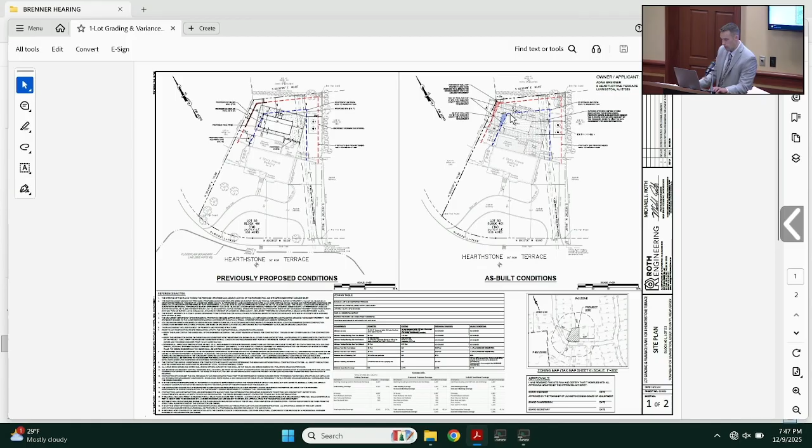Yes, so these are the plans that are on file. Correct -- the plans before you on each screen, sheet 1 of 2, is the site plan sheet from the submitted plans with a revision date of April 14, 2025. The right view shows the conditions that were built. I'm going to zoom in so we can see what the relief is that we're requesting.

Mr. Skolnick, other than the color, is this what was submitted to the board? I think we submitted it with color -- we did submit it with color, yeah. There we go, even better. Mr. Skolnick, can you just move the mic for me?

Okay, so Mike, in my opening statement I called out about 7 square feet of the spa, and that's backing up to the school property in the back? Correct, yeah, and I'll run through each item.

So we have the constructed pool located 14.4 feet from the west side property line and 19.8 feet from the north rear property line, where the minimum requirement is 20 feet. The constructed spa is set back 17.8 feet from the north rear property line, where the minimum requirement is 20 feet.

So those are the two variances, the first two. The pool setback line on this plan is shown by the blue dash line, and the hatched blue areas are the areas that don't comply with the setback. We're talking about 7 square feet for the spa and approximately 73 square feet for the pool. Those blue hatched areas do not comply.

Next, for the constructed wall, the wall is located 1 foot off the subject property line. We're proposing to remove that encroachment. The minimum requirement is 5 feet, so the dashed red line is the 5-foot setback, and the hatched red area is the area that doesn't comply.

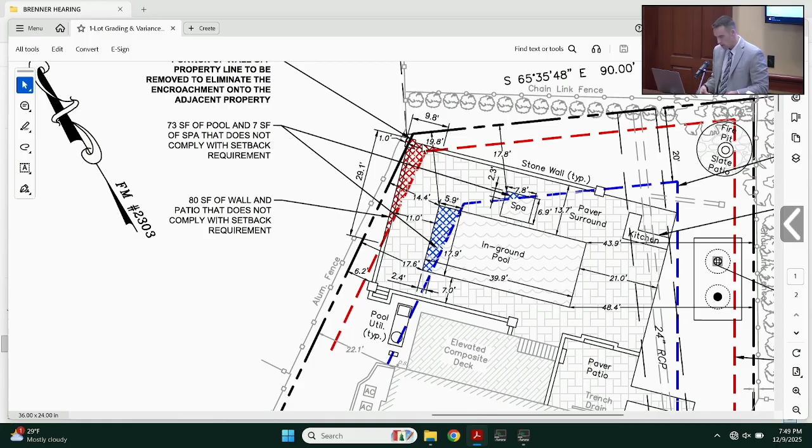Okay, can you go to that third slide there with the exhibit? Sure, let's go right into that.

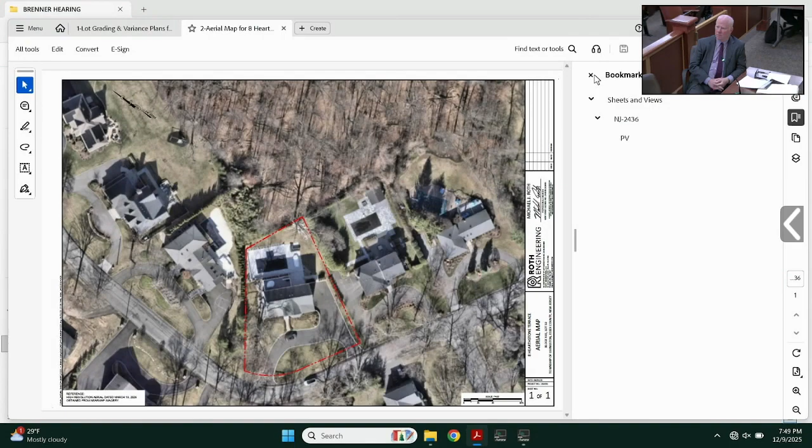We prepared two different exhibits that we look at in conjunction. We have an aerial map which shows the subject property outlined in red and the surrounding properties, and we look at that alongside site photographs. We'll have to mark these since we're starting from scratch. Mr. Roth, if you go back to that one, the aerial will be marked as Exhibit A1. And if you flip over to the other image, we'll mark that as Exhibit A2, which is a site photograph package with five photographs within it.

So I'll flip back to the aerial map. The common property line that's the focus of discussion tonight is the western property line, where the adjacent property is 10 Hearthstone Terrace, on the left. I'll walk you through the photographs. Right now we're looking northwest along that common property line. You can see the existing landscape buffer there. That's a pretty dense buffer you've got.

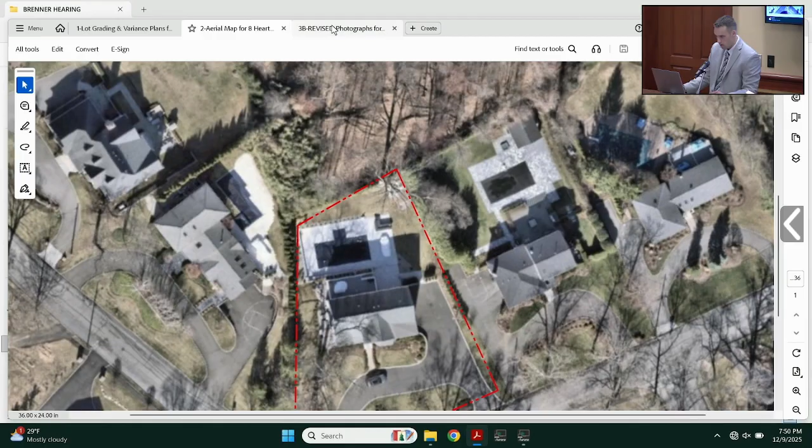Absolutely. Now we're getting a little closer, in the backyard, same view looking northwest along that common property line. What we did with this photograph is, as you can see, the constructed pool and patio are on the right side. We have an existing fence, and then this very well buffered area along the fence.

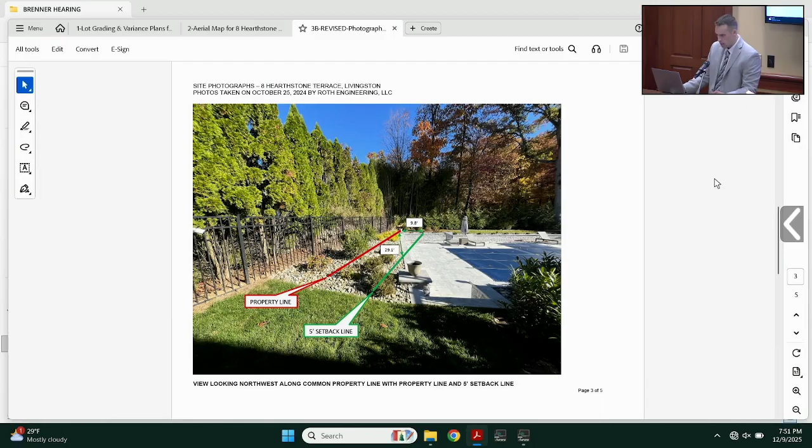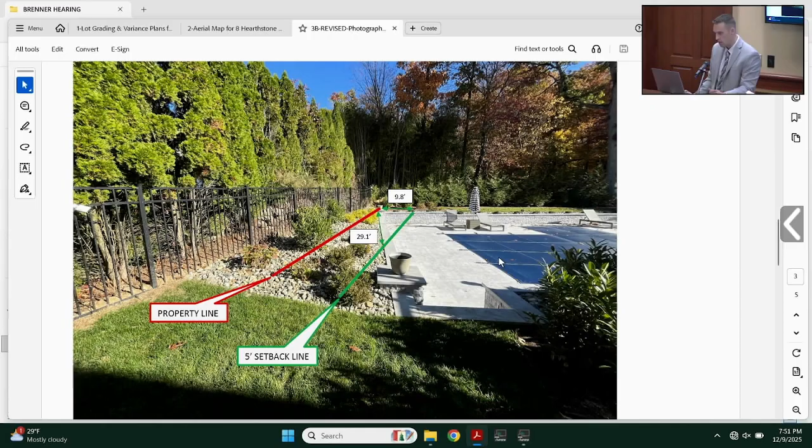On page 3 of 5 here, what we've done is superimpose the property line in red, and the 5-foot setback is shown in green. By doing this, you really see the visual impact, and there really is no impact to the adjacent property based upon the topographic grade change between the two properties and the fact that it's extremely well buffered along that common property line. So let's run through this.

You have this marking 29.1 feet and 9.8 feet - that's the portion of the 3-foot wall that's causing the need for that variance. Correct, that's the portion that doesn't comply.

Okay, and you heard Ms. Brenner say, look, it can be moved, they're willing to move it, but is it really going to do anything from a practical land use standpoint to help out the neighbor, given the grade change and the buffer? I think that's the question I'll pose to you as a planner. Sure, yeah. Do you see any detriment here to the public good, which our courts have said is the neighbor's property?

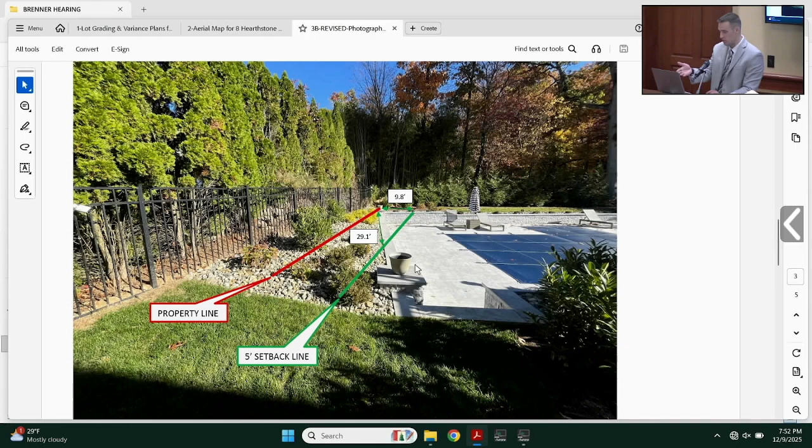Right, so yeah, I see that there is none. By moving the wall, nothing changes with this existing landscape buffer, it's going to remain the same. The fact that it's there today, it works well, it screens the neighbor's property. I see virtually no detriment to the adjacent lot.

So, in essence, we're saying this is a de minimis, virtually no detriment sort of case. Even if we could move that 3-foot wall, it could be torn up and placed on the green line, that would comply, right? Correct. That 5-foot setback only affects a portion of the 3-foot wall.

If it was picked up and moved and placed on the green line, we'd eliminate that variance. That's correct. Can I interrupt just for a point of clarification on the picture, because I'm confused?

I see the property line in red, but you have the fence, and you need a pool fence that the property owner puts. Are you saying there's no fence, and that's the neighbor's fence on the left? I'm not sure it's fenced, but there's an agreement between the neighbors. Livingston has some rules and regulations about sharing pool fences. Okay, so this is a sharing of a pool fence situation? Yeah, I just want to make sure I was understanding the picture correctly.

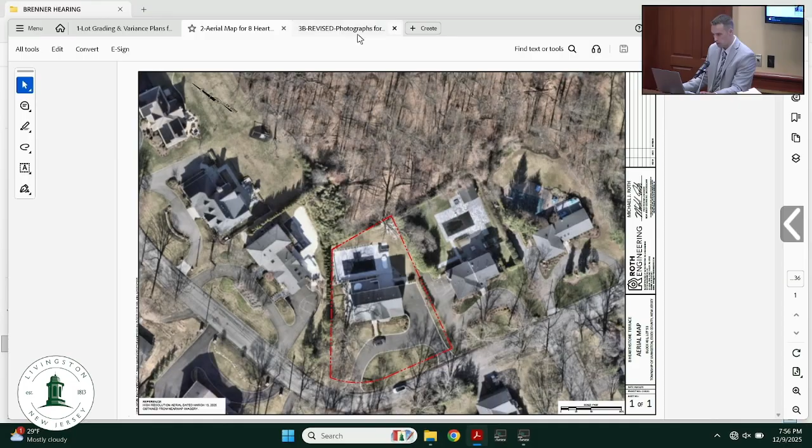Okay, if you balance those aesthetic and related benefits versus the detriments, do you have an opinion on whether we outweigh here? Yeah, I would say the benefits definitely outweigh any detriment for the project. And I will note that the township stormwater requirement is actually quite high compared to other towns. We have a drywell designed for the 25-year storm, which we're talking about 6 inches of runoff. So we feel that we're mitigating the project based upon that stormwater management system. So some additional benefit.

Compared. So, Chairman, that's most of it. I know some of the members have heard it's not that complicated of a case, but our core argument is really that this is a no detriment or virtually no detriment case, even if we were starting from scratch and it wasn't built. And we appreciate the very difficult position that this puts the board in. We understand that. I've had a few cases now. These are all quite difficult for you because you're faced with something that was built and something happened here. But we're here to try to make it right and correct it and go about it in the right way. But I think that the 7 square feet for the spa, the 73 square feet for the pool, and a portion of a 3-foot retaining wall, really imperceptible to the neighbor.

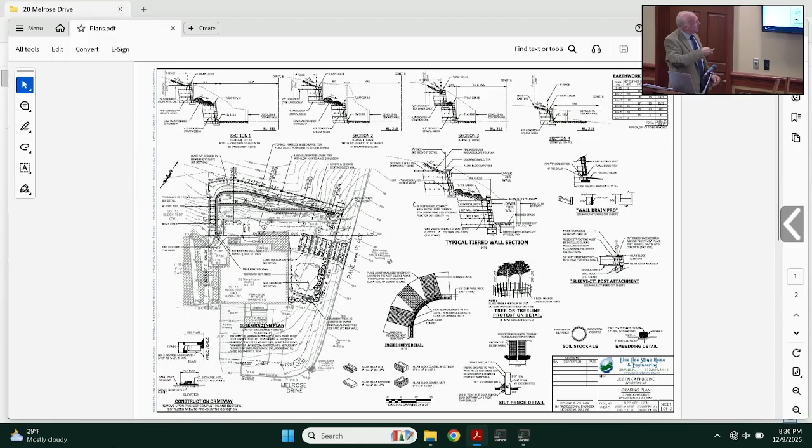In between. Why isn't this working? Oh, it doesn't work on there. How about that? Yeah, okay. So basically, here's the lower tier wall, and then this is the upper tier wall.

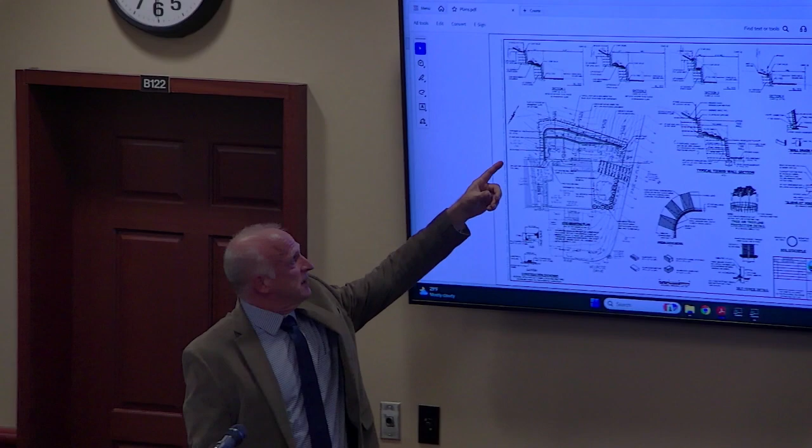Lower tier wall, maximum 6 feet, 6 feet exposed height. And the maximum height on this wall back here is 4 feet. I say exposed because obviously there's a little bit that's buried in the ground.

And also on the upper tier wall, it slopes up from the front of the wall to the back, at a 4-to-1 slope, which is traversable. You can walk on it. It's not so steep that you couldn't walk on it.

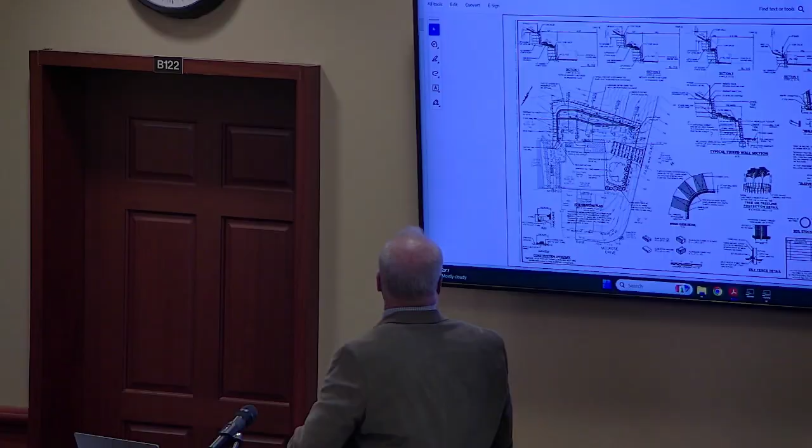But that was provided to be able to push the wall back as far as possible and still not affect the rear neighbor behind. That was really what drove this whole project, the rear property line.

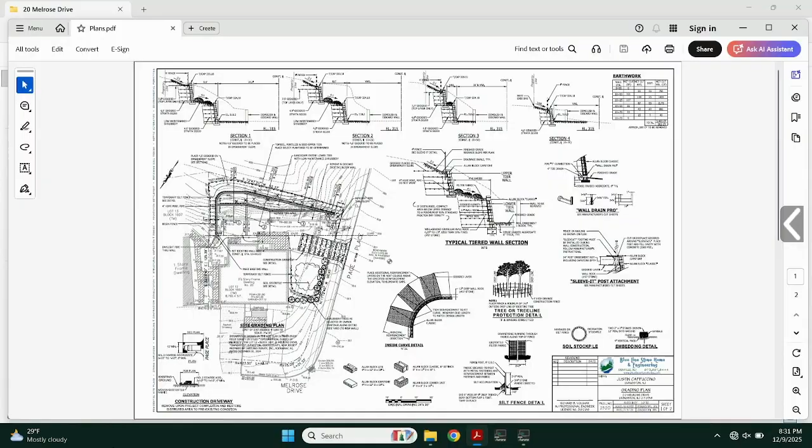So just to jump back a little bit, there is an existing wall there now. It's about 4 feet high, a CMU block wall, not the most attractive wall. This is a modernized, updated wall, called modular block.

You've seen them all throughout town. They have a decorative face, a chiseled rock look to them, as opposed to the sheer, bland CMU wall that's there now.

So that wall is about 16 feet from the back of the house. As you can see, the family is growing, so their objective is to increase the size of that backyard to make it usable, and make it a fair and reasonable use of their backyard.

So what we've done, I think, is listen to the commentary from the zoning officer. We've met those comments, and we've kind of arrived at a median where, yes, we do need a variance for height.

I will submit that the way the code is written, it looks at the overall height from the bottom of this wall to the top of that. That's what gets us to 13 feet, which is why we're here.

But the spirit of that ordinance, I would submit, is a 10-foot exposed face of wall, and that's what we have. We have a 6-foot lower wall and a 4-foot upper wall, designed that way so it doesn't look top-heavy, like the upper wall is going to fall over on top of the bottom one. So again, back to the aesthetically pleasing aspect of it, we think we've met that.

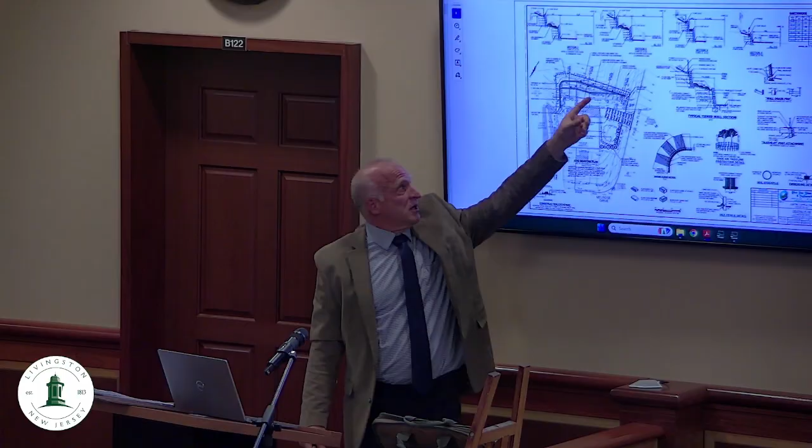They've since planted some arborvitaes along here to stem the tide of the erosion that's happening and flowing over the wall. But it's kind of a mess, the slope is a mess.

And we think that by providing this two-tiered system now, we meet two objectives. Obviously the safety issue will be eliminated because the trees are going to have to come down, and it stabilizes the slope. We'll no longer have this sheer face of dirt that is eroding onto their backyard. So we meet two positive criteria there: it's a safety issue and also a drainage issue.

To touch on the drainage, whenever you construct or design a wall, you want to make sure you provide a mechanism for the water behind the wall that's going to percolate into the ground to have relief. I've done that. There's weep holes, holes in the bottom of the wall, with perforated pipe that collects the water and allows it to drain out the front, releasing any soil pressure on the back of the wall. That's how these are able to stand up.

I've had this question before at other boards about the water—how much, is it going to erode the property? The water that comes out of this pipe is best defined as a trickle. Even in heavy rain, it takes a long time for the water to perk down, get in that pipe, and outlet. It comes out less than your gutter does—nothing substantial with any velocity or erosive power. It's basically there to release the wet soil pressure from behind the wall. I've provided that in two points, here and here.

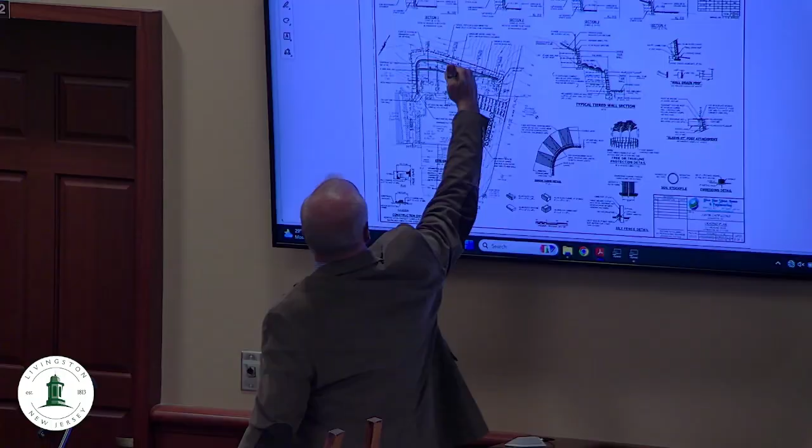As you can see, there's still a good bit of yard they won't be able to use, but we're dressing it up—it's aesthetically pleasing, the wall. We're adding vegetation on that mid-tier, and at the top, for safety, there's going to be a 4-foot fence as well. So that's my pitch.

Does anyone on the board have any questions for this witness? Why don't you go first then? Yeah, the board was handed out five. I violated my own rule.

The board was handed out 5 photographs on 5 pages, color photographs of the current conditions of the rear yard. Would you agree we'll mark this as Exhibit A? We'll give Ms. Hollis this set.

And that is a fair representation of the current condition, Mr. Vollmer? Yes, sir. That one there tells the whole story—you can see those exposed roots. Matter of fact, the tree that used to be there, there was a couple of trees, right Justin? They were leaning, and they've already been taken down.

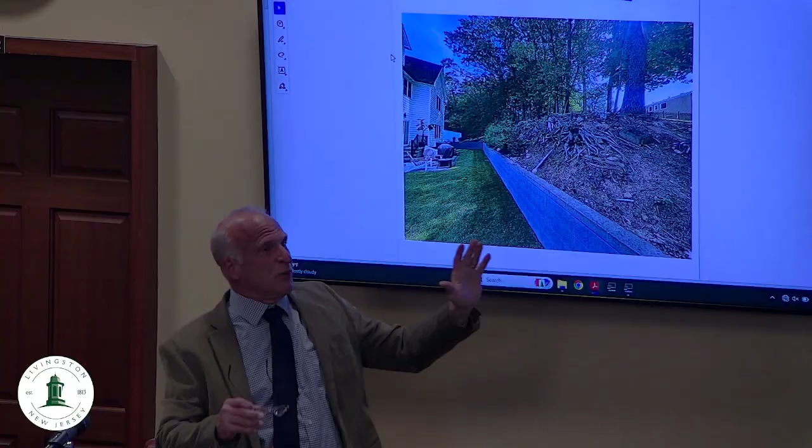This is what was there, these exposed roots. Here's the arborvitaes that they planted to try to control it. The picture really doesn't do it justice. It's a hard climb for me when I'm stood on this wall, and we were kind of eyeballing how far we could pull this wall back. It's pretty steep here on the upper wall. I'm not sure if this tree has to go or not, but this pretty much shows the condition. I don't know if it gets the full flavor of how steep and ugly this is, but it is.

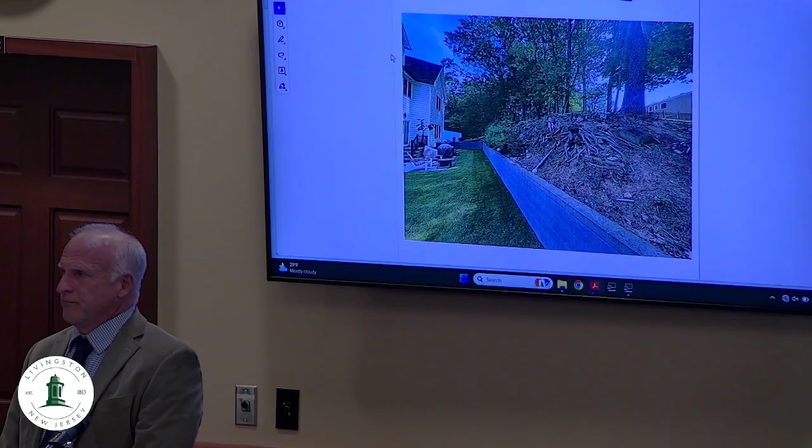So, Mr. Vollmer, what you're showing there, going to your C1 proofs, what you're saying is because of the severity of the grade and the slope, the property owners don't have any other option than to use a retaining wall system in order to gain backyard space. Correct. The other option would be to have no wall and just grade it up at a reasonable 2-to-1 slope that would be sustainable. However, we don't have that luxury.

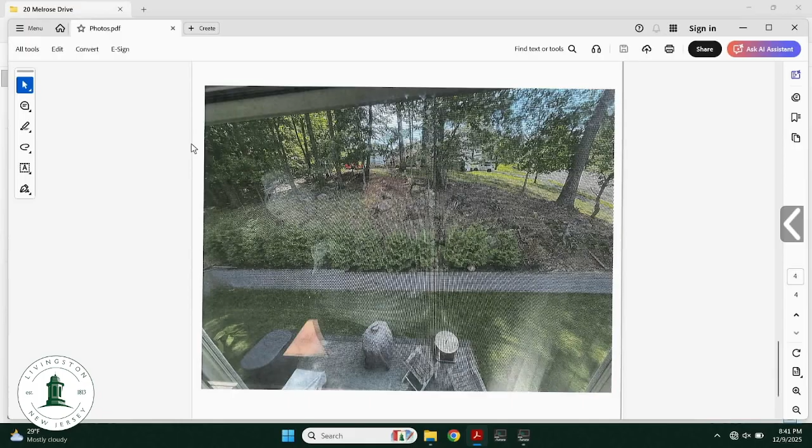The backyard, that top of the cut, would cut into the neighbor's yard. I don't think that they want us to do that. Obviously we can't do that. Sorry, as we go through these photos, can you just scroll up to that last one?

So that rock at the bottom of the wall, that's fresh. These rocks that you can see throughout all five photos, they're randomly ending up in the backyard. The erosion is so bad that ultimately we get these, and that rock doesn't look large, but if that landed on any of us it would be pretty damaging. That thing is way heavier than it looks, and that's one of the smaller ones.

You can see in any of the photos there's a real concern on the safety and the erosion on that slope, and that was kind of the thought process when we started thinking about how to fix this in the backyard. We thought, well, we're going to have to excavate a ton, we're going to have to take down a ton of trees. And the idea was, if we're already going to be going through this massive project, might as well make it something that looks good. Again, this is on a corner lot.

That's the best looking picture of our backyard that I've seen, so we didn't do ourselves justice in terms of this argument. It is atrocious to look at if you're walking up Page and Melrose and you look to the left. It is not aesthetically pleasing for anyone that has to look at it.

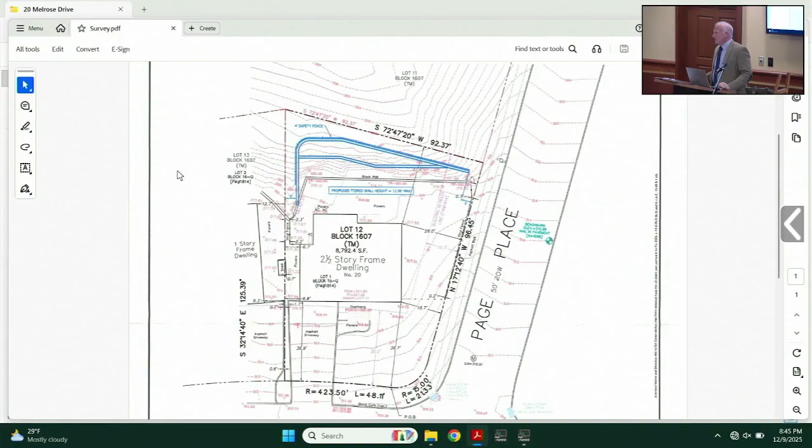I'll say this certainly makes sense for the topographical issues you have. That's probably your only solution, so I think it's a pretty good application.

I agree. I just have to say, when I drove by, I audibly gasped when I saw those roots. I think we all understand why you're doing this, and this is really going to be a huge benefit. I gasp every morning, that's how I start my day, looking at the backyard. Hopefully it's a tremendous improvement, and it'll improve the quality of life for you and your family, and I think it'll be beautiful.

And you won't have rocks pouring down into your backyard anymore. It'll be safe, hopefully. Does anybody else on the board have any questions?

First, I want to say it looks great. I think you did a great job, and I appreciate you coming up with a plan that keeps the 5-yard setback, as well as listening to the town. It sounds like our zoning official or engineer had a great idea, and I think this makes sense. I appreciate it.

I agree, I drove by the property, so I think it's a great design. My question is about the trees, there might still be trees high above on the neighbor's property. Is that still going to be equally safe? That was the one concern I had, not as far as your neighbor being concerned about them being loose or falling, but that was my question.

We designed a new house for this lot. The zone is R3, and it's a single-family house where we have all the living spaces at the first floor. Also, we have a guest bedroom located on the right side of the building, the rear right side. The floor area at the first floor is 1,728. The garage area is 436. The garages, we have 2 car garages, side loaded on the left side, as you see.

And the basement, which the image on the left shows just one big open space, and also we have a playroom and a bedroom included as part of the basement layout. The livable area in the basement is 1,728.

The next sheet on the left presents the second floor. We have 4 bedrooms with closets and bathrooms. We have 3 bathrooms located at the second floor. We have also a laundry room. The attic space is also accessible from pull-down stairs located at the front of the interior stair going up.

The design of this house - let me also give the livable area. The second floor is 1,791. The floor area ratio is 25.11 with the floor area of 3,519.

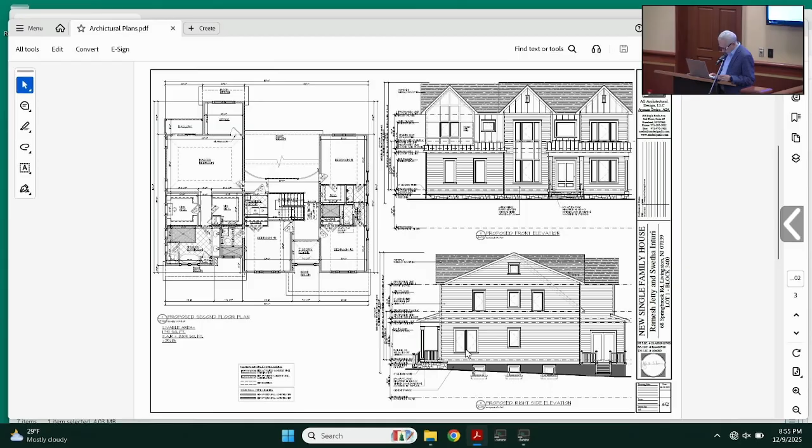Mr. Cedra, are you or is Mr. Graviano going to speak to the front yard setback? He is going to speak. Okay, all right. Does anyone on the board have any questions for this witness? Does anybody in the public have any questions for this witness? Please come forward.

My name is Alan Baren, I'm a resident of Livingston.

I just wanted clarification because I didn't understand. Can I just have your last name again, sir? Sure, Baren, B-A-R-E-N. Alan, A-L-A-N.

An address? Is it okay if I give this for the written record? I don't want it to be on YouTube. Okay, no worries, go ahead. My wife will kill me. Just make sure you guys stay by the mic.

Sure, so the one thing I just didn't fully understand, but that could be my understanding as well - you mentioned that you're not exceeding the max HFA for Zone 3. So my question is, why do you need the 21 to 25% variance? Mr. Graviano will describe that for you so you can understand.

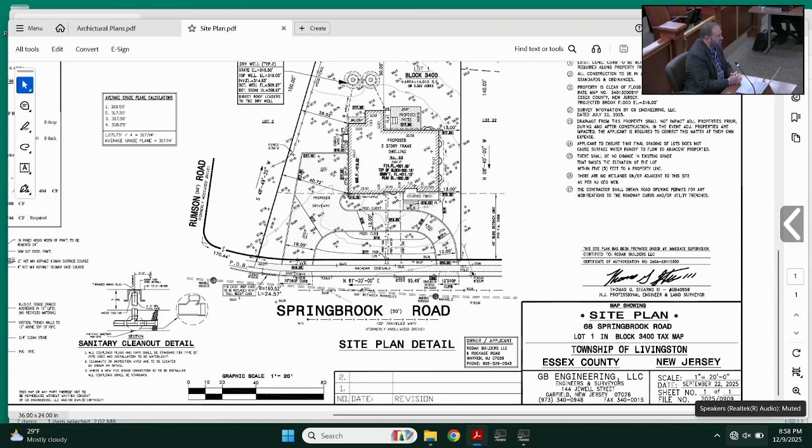Mr. Wenzel posed the question regarding the front yard setback. The applicant is meeting the front yard setback despite the fact that a variance was indicated on the agenda as well as the notice. The applicant is meeting the required 50-foot front yard setback. So, Mr. Graviano, correct me if I'm wrong - for 68 Springbrook Road, the front yard setback is actually 50 feet? Yes.

And the zoning table then needs to be updated? Yeah, there might have been some confusion. The existing front yard setback is 40 feet. The applicant's actually increasing the front yard setback 10 feet to 50 feet. Wait, 40 feet also? Let's hold on, Mr. Graviano - that says, but everything says 40, at least on the site plan.

So, just for the record - what do you have then for the rear yard setback on the site plan? 40 right here. 40 and 40. Sorry, I must have been given an older set of the plans. This is why you gotta rely on the paper version, Mr. Graviano. Yeah, digital is not as good.

All right, so there is a front yard setback, but I'm sure you have some testimony as to that. Yes, that is consistent with the existing front yard setback of the current dwelling, part of the established neighborhood development pattern. Just to clarify some of the questions that the neighbor had before, as the board knows, and I'm doing this for the public's education, Livingston has both a habitable floor area ratio requirement and a maximum habitable floor area square footage requirement. What Mr. Sedra was indicating in his testimony is that the applicant's plan meets the maximum habitable square footage requirement, but does need the habitable floor area ratio variance.

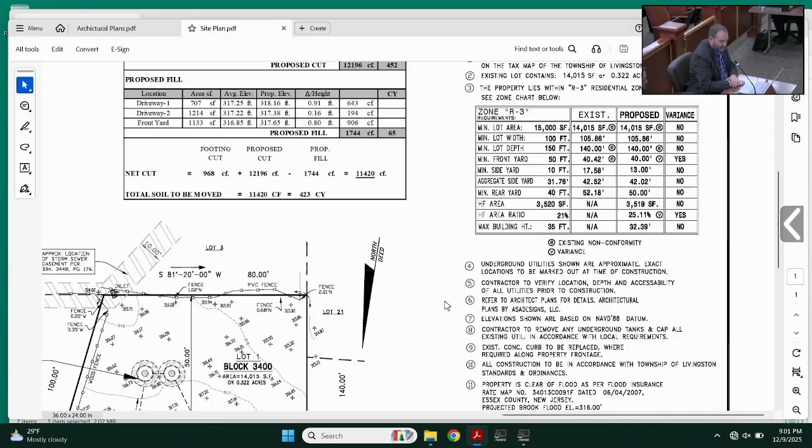I would like to note that this is a slightly undersized lot. 15,000 square feet is required; 14,015 square feet is existing and proposed with this application. The applicant does not require any other setback relief beyond the aforementioned front yard setback, which is consistent with the existing front yard setback of the dwelling today. I did a visual survey of the neighborhood, both in person as well as aerials, as well as analysis of the tax data of Block 3400. This is certainly a dwelling that would be in keeping with the established development pattern of the area.

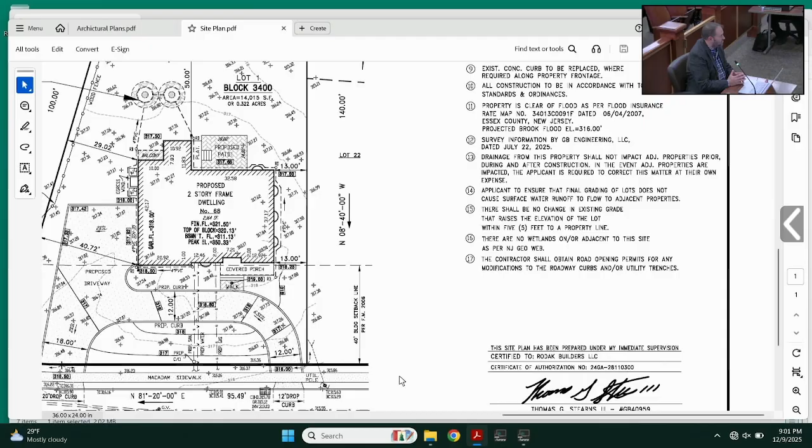When looking at a habitable floor area ratio variance, the applicant must demonstrate that the site can still accommodate the proposed dwelling notwithstanding the request for the habitable floor area variance. Certainly, the applicant is meeting all of the side and rear yard setbacks. There is a minimum rear yard setback of 40 feet, and the applicant is actually providing a rear yard setback of 50 feet.

The applicant is exceeding both the minimum side yard and aggregate side yard requirements with this proposal, and is also meeting the off-street parking required for the proposed dwelling.

Looking at this in the context of the proof for the FAR variance, the applicant certainly advances purposes of zoning of the municipal land use law, specifically Purpose A, promotion of the public health, safety, morals, and general welfare. That's being done by providing a new dwelling built to current codes, standards, and modern living arrangements. Additionally, it advances Purpose G, to provide sufficient space and appropriate location for a variety of residential uses to meet the needs of New Jersey citizens.

As you can see in the impeccably designed house by Mr. Sedra, it certainly advances Purpose I, to promote a desirable visual environment through creative development techniques and good civic design and arrangement. I certainly think the applicant's modest 4.11 FAR request can be accommodated without substantial impairment to the zone plan or zoning ordinance, as well as the public good.

With respect to the front yard setback variance, I believe that also can be granted under the C2 criteria, advancing purposes of zoning A, G, and I that were given with the FAR variance analysis.

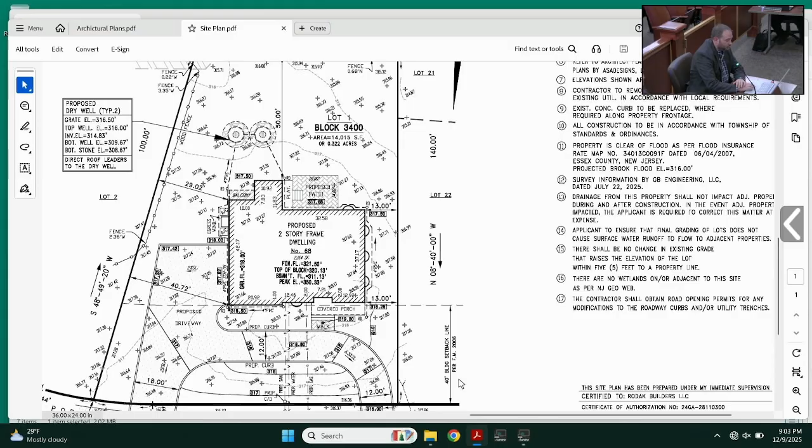Does anybody on the board have any questions for this witness? I do. Ms. Graviano, do you have a front yard setback analysis for the neighborhood for this property? Give me one moment. Thank you.

Mr. Sedra indicated that the analysis was not performed because there were not 3 houses to perform the analysis. So the applicant kept the front yard setback that existed at the dwelling today. The applicant is actually exceeding the rear yard setback.

If it's the board's desire, is there space to push the house back, Mr. Sedra? It just would make the left side a little bit tight to make the garage side entrance as we show it.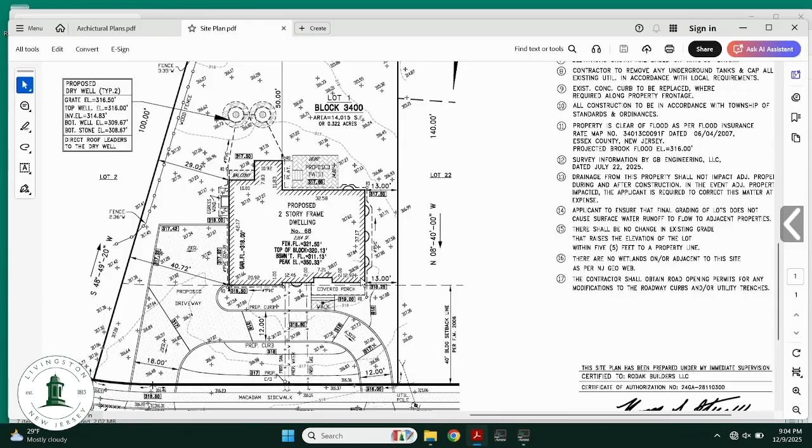Also, I would like to mention that I spoke with the engineer today about the setback, and they told me that the filed map shows the 40 feet setback line as being what's known in this area and the neighboring properties along with this house as well. That's what they call, also, if you look in the survey, on the right side of the survey, you will see a dimension called 40 feet building setback line per F.M. 2006.

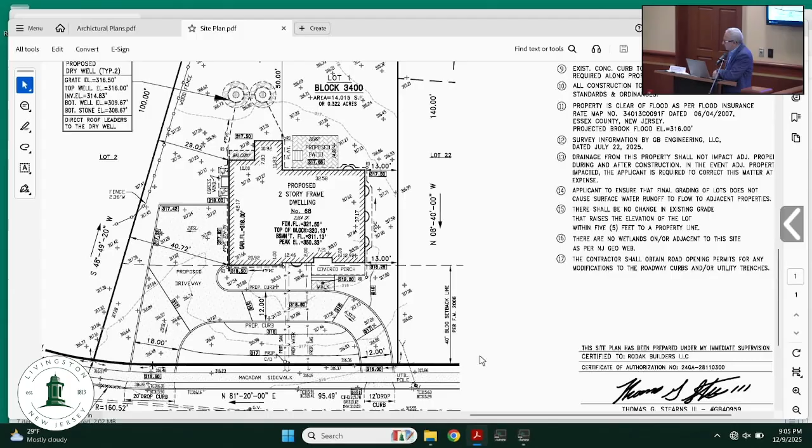I'd also like to note that this is a bit of a unique configuration in terms of this block. The house sits in the middle of 2 dwellings, neither of which front on Springbrook. When you look at the house on the aerial, the front yard setback does line up with the side of the houses on both Birchwood and Rumson Road.

So this is really a house that's within this block. There's only one house that fronts on Springbrook Road, and that setback is consistent with the sides of the dwellings on both sides of the street.

I have a question. So the application states that the applicant is Mr. Jetty, but on this plan, it states that the owner applicant is Rodak. So who actually owns the property at the moment?

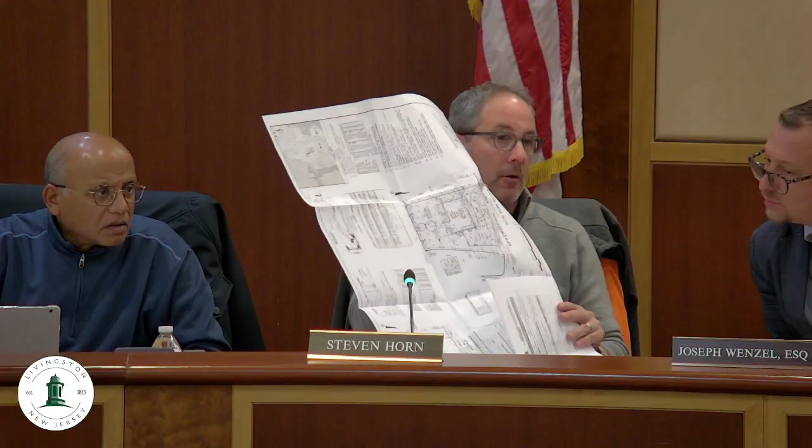Okay, so all right, well, any applicant would have to, when they present a formal plan, if they get approval, when they present plans to submit to the building department, those updated, revised, as-built plans will have to be updated accordingly. The applicant will update the plan, and the applicants are the homeowners of the property.

Does anybody else on the board have any questions for this witness? Does anybody in the public have any, please?

Hi there, Alan Barron. This shouldn't affect the applicant's request, but I'm a stickler for details, and it may affect the way the variance is being asked for.

From what I see, this lot is 14,841 square feet. If you just do the simple math of dividing the max lot size for an R3, which is 3,520, by that lot size of 14,841, the variance you need for that is 23.7%, not 4.11%. So I'm just a stickler for facts and not giving out variances we don't need to be giving out. They only actually need a 23.7 variance, not what they're asking for.

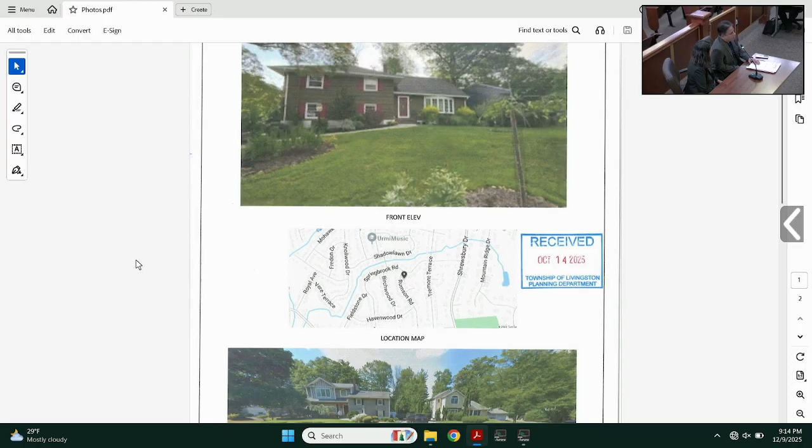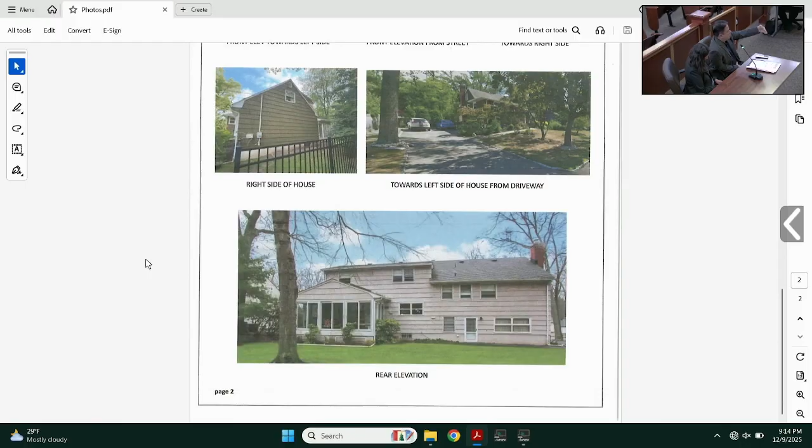The house we have is a 70-year-old split-level house. We are not rebuilding, we are just extending a little bit in the back to get extra space. So the front yard setback that you see is a pre-existing non-compliance. The front wall of the house is already, I think, 41.29 feet from the road, so that doesn't change.

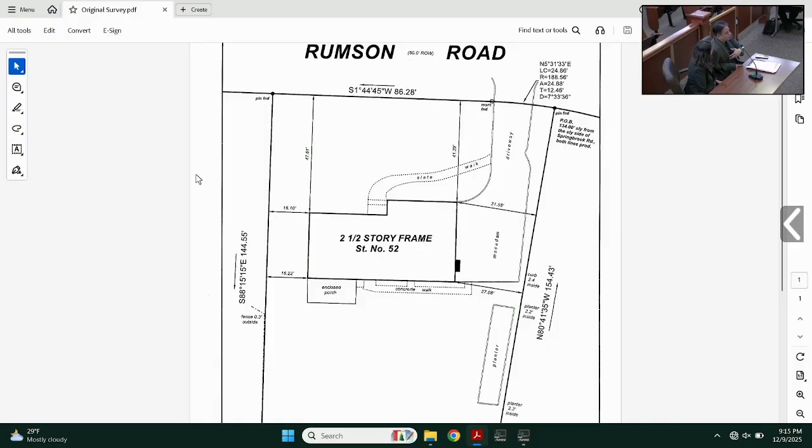The only real variance we're asking for is the FAR. We're not going to be able to do a project of this size in the near term again, so we wanted to make sure we check off the things we want: a proper master bed, an office, and a bathroom with the bedroom for when her parents come by and visit. So once we designed the house with the architect, this is a derivative of that. We didn't reverse engineer it, saying let's start with 21% and then design the house like that. That's where we're at right now.

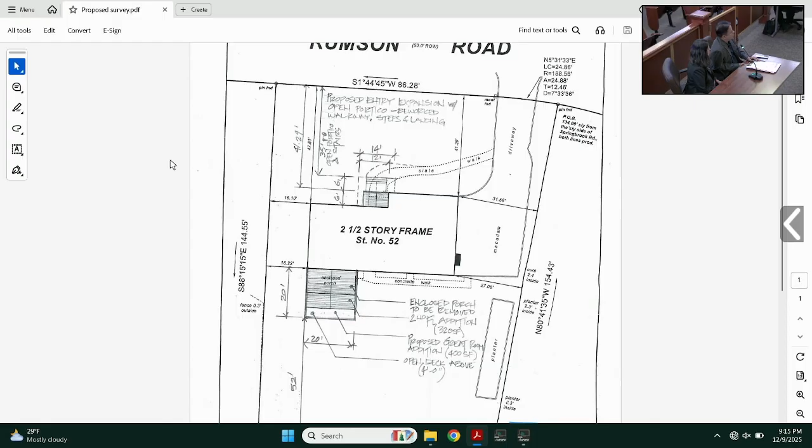So sir, other than the pre-existing front yard, the home as proposed meets all the other setbacks for the town, the rear, the side yard, and the height, all those are met, correct? Absolutely, not going to violate any of those. And the amount of habitable floor area, the actual square footage, you're at or below that standard, you're not asking for a variance for that? Yeah, I'm not. And even for the HFR, we are just going a little bit above the ask, but it meets all our needs.

So right there is an image of the lot. If we can make that a little bit smaller so we could see the whole lot. That lot shape on the right side is on an angle, so that's a little bit irregular from a normal rectangular lot.

So your front yard is slightly smaller than your rear yard, so you're somewhat undersized? Yeah, because of that. And your habitable floor area ratio overage that you're asking for that variance is not even a full percent, it's 0.75%, right? Yes. So you're not that much over? That's the idea. And the house to the right is the corner house, that's where Rumson and Springbrook meet. That's why the lot is uneven.

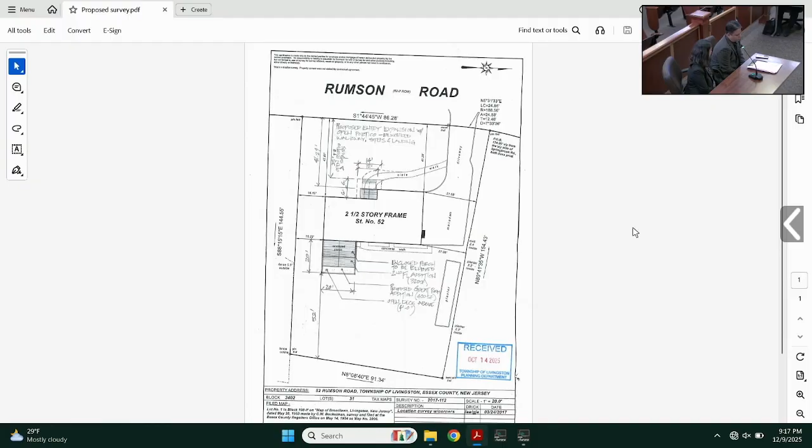Okay, so it's a de minimis violation, right? And as our attorney indicated, everything else is within the rules. We're not violating anything else, and the one violation is existing.

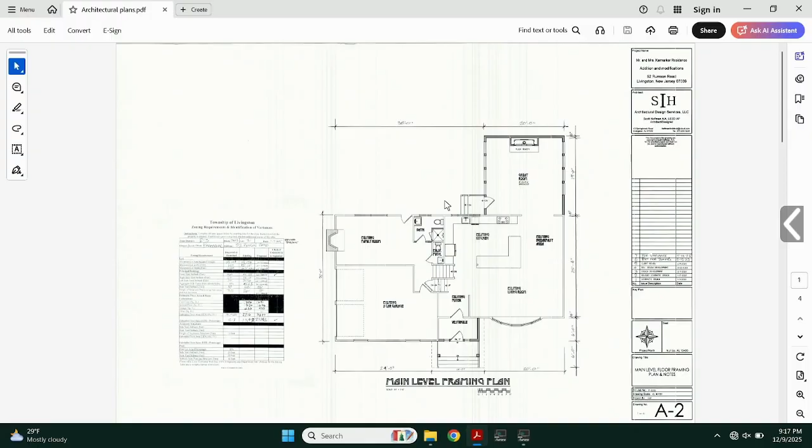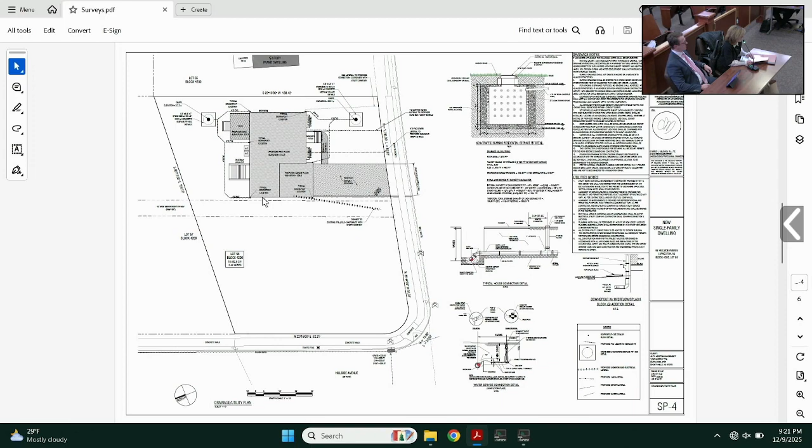Yes. Ms. McGovern, who do you want to call first? We're going to call Camille first, please. Okay, sir, do you swear to tell the truth for the zoning board tonight? I do. Okay, and you're with Alta Asset Management, correct? That is correct. Okay, go ahead, Ms. McGovern.

Camille, what is your relationship to Alta Asset Management? I am the managing member and owner. Okay, and does Alta Asset own the property at 63 Hillside Avenue? Yes. And when did the company buy that? In August. Okay, what is currently on the property?

It's a single-family home. And you propose to tear it down, why is that? The home is in complete disrepair. The foundation has collapsed on the right side of the house. There's been water intrusion for years. There's rot, mold - I mean, the house is not fixable.

And what is the proposed house that you'd like to build there? It's going to be a center hall colonial. I've done a number of projects in town, so it's going to be very similar to some of the others that I've constructed. It's going to be an open concept on the first floor with a formal dining room, office for the work-at-home family, with an in-law suite for any family members that are elderly and can't go up the stairs - a separate little bedroom with an ensuite on the first floor. And the second floor is going to have 4 bedrooms and 3 bathrooms, and a finished basement with a rec space and a gym and things like that.

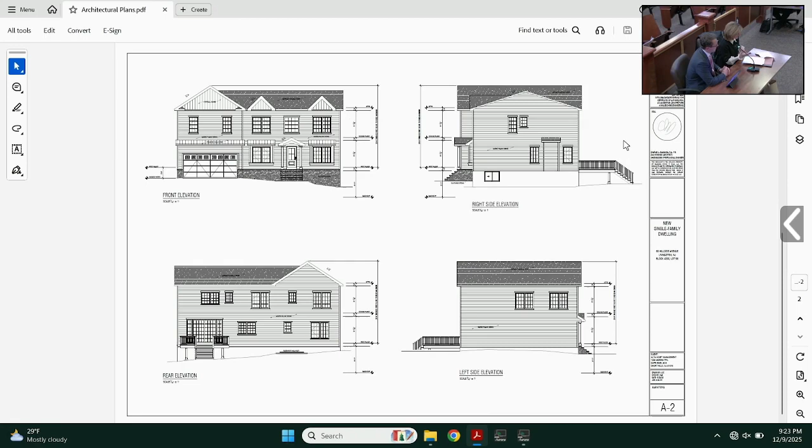Thank you. Now, you're changing the orientation of the house to Belmont Drive, correct? That is correct. How will the front yard setback - I realize we're a corner property - but how will that line up with the other homes on that side of the street on Belmont, if you know? Sure. So we are the only R3 lot on that side of Belmont.

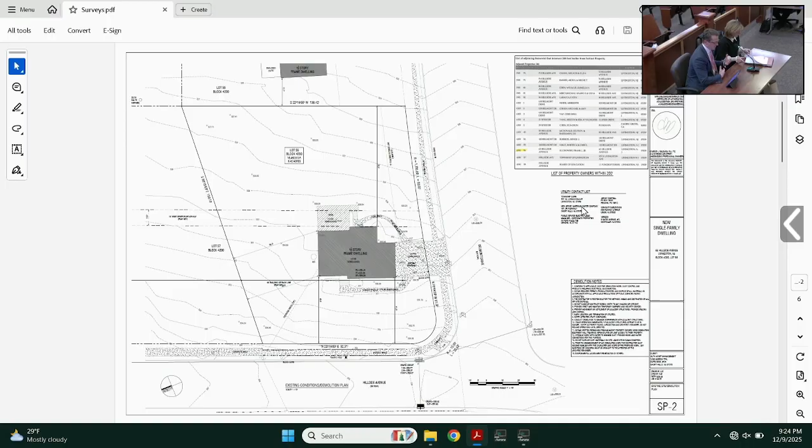All the other homes are R4. Even though we're on the corner and we really don't qualify for an established setback, what I've done is make sure that we're going to be in line with the surrounding neighborhood. We did do a laser analysis of the 4 adjacent homes down Belmont to ensure that we will meet at least a setback in line with those. So the setbacks of the other homes were 44.4, 46, and 43.8. So that's where we arrived with the front yard setback as we currently designed it.

Okay, thank you. I have no more questions for you, but the board may have some. Does anybody on the board have any questions for this witness? Does anybody in the public have any questions for this witness? Back to you. Thank you.

I'd like to call Mr. Baldanza.

Do you swear to tell the truth for the zoning board tonight? I do. All right, can we please have your name for the record, sir? Yes, the name is Charles L., middle initial, Baldanza, Baldanza.

Okay, and I understand that you're a triple threat. You are licensed as an architect, a planner, and an engineer in the state of New Jersey? Yes, that is correct, and my licenses are up to date. I've also had the pleasure of testifying in front of this board on several previous occasions.

So, Ms. McGovern, are we going to have this as one testimony for now, covering all three? We're going to combine the whole thing to move this along. Brevity being the soul of wit? Yes, okay, all right.

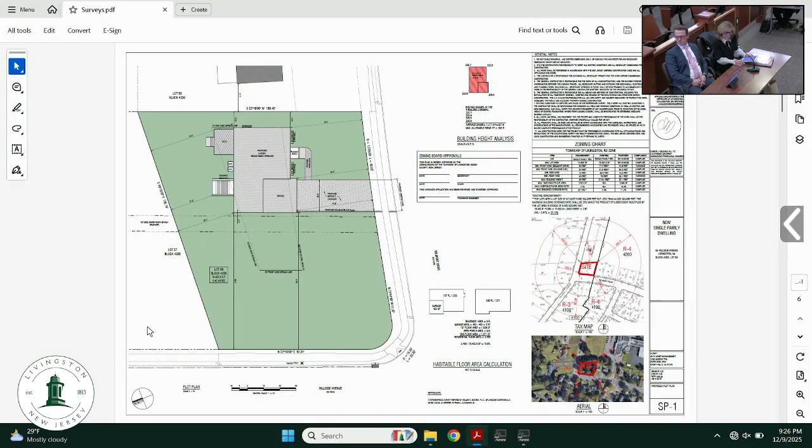Thank you. Charlie, could you take us through the existing site? Okay, so we're at the intersection of Belmont and Hillside. We're at the corner, on the northeast intersection of Hillside and Belmont. We're located in the R3 zone.

So you can see on this, let me try to zoom in here. Having a little trouble here. As you can see from the key map, we're in the R3 zone. The R3 zone begins right there, there's two properties across the street, and we're the only property in the R3 zone before the R4 zone begins on Belmont. The area of our property is 18,452.8 square feet. That's 0.42 acres, where 15,000 is required in the R3 zone.

The property is somewhat irregular in shape in that it's trapezoidal. The major characteristics are it's a corner lot, so we have a very constrained building envelope, which I'm emphasizing with the pointer, because of the shape and due to the fact that we need to provide a front yard setback from each of the streets that we front. The other principal issue is we have a 10-foot wide sanitary sewer easement, which goes pretty much dead right through the middle of the lot. That was our big design challenge in trying to deal with this and design the home while complying with all the other requirements.

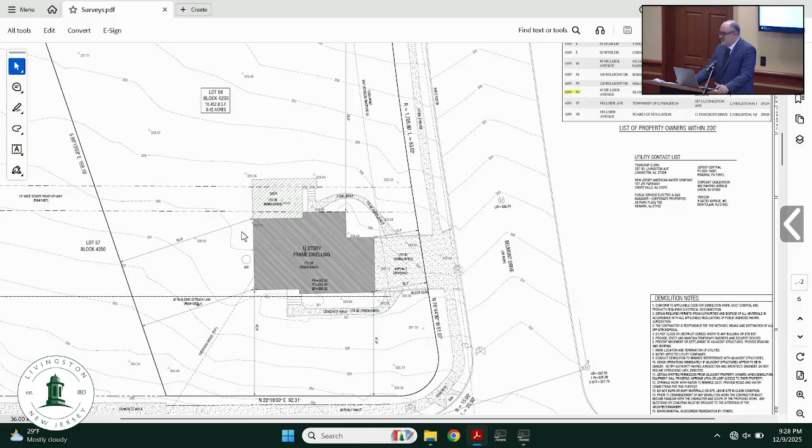So let's talk about the existing home that's on the lot. You saw some pictures of it previously. I'm going to point out a couple things. As Camille mentioned, it's an older home. According to tax records, it was built in 1956. It does not comply with several of the bulk standards, including frontage from either street - as little as 17.7 feet on the Belmont side, and I think it's 41.9 on the Hillside side. So the house is non-conforming.

Let me point out one other fact about this house - the deck is built right over the sanitary sewer. We haven't figured out how that happened, or if that was allowed, or if somebody built that without a permit. But I think it illustrates that we have a non-conforming house as far as the bulk standards, and the fact that they built the deck over that easement just shows how much of a challenge it is.

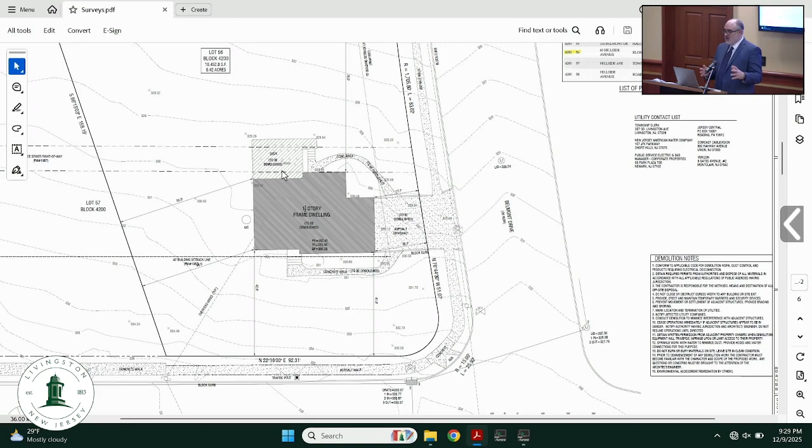I also want to point out, as far as the way it's looking, the house faces Hillside, which you can see from my pointer, and the two houses across the street face Belmont. As I mentioned, they're in the R3 zone on undersized lots, which really conform more with the R4 standards from my analysis. What we're proposing is the new home to face Belmont, so it's really going to fit into the neighborhood - but I'm jumping ahead.

Let me briefly mention, as far as the grading and the proposal of what we're doing here.

We are maintaining the existing grades on the site. As far as stormwater goes, we're going to be providing seepage pits, so we have a drainage system. We're going to be maintaining the existing drainage patterns, and we're going to be improving the drainage. Even though we're slightly increasing the impervious area, we're going to be more than making up for that by having a drainage system. We did get an engineering review memo, and there are only a few points raised, but we're going to comply with all of those points.

So if I may describe the proposed building, we're going to be putting in a house, as Diana mentioned in the introduction. We're complying with the habitable floor area ratio, the habitable floor area square footage. We're complying with everything except for the front yard setback and the rear yard setback.

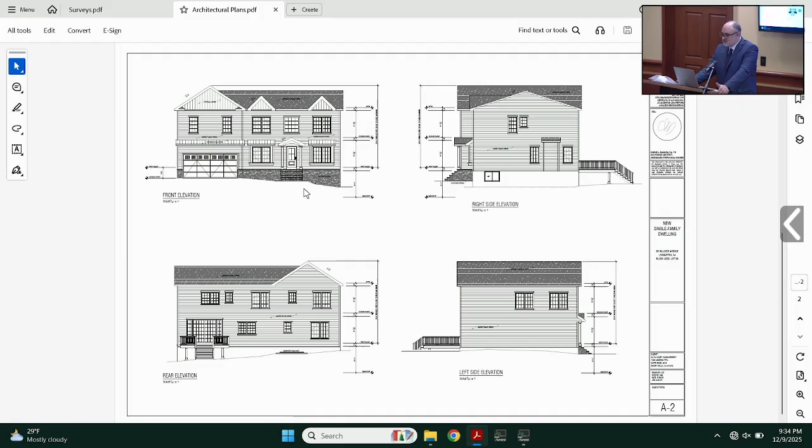We have some stone accents on the front. I'll point out we have a bedroom on the first floor, which is something that is often asked for in my practice. We're hearing more and more about people wanting a bedroom on the first floor for convenience, for in-laws, aging in place, that type of thing.

Okay, so we can move into planning. Why is this a C1 variance? Talking about the variances, and putting my planner hat on, I guess I'm transitioning over to the planning role.

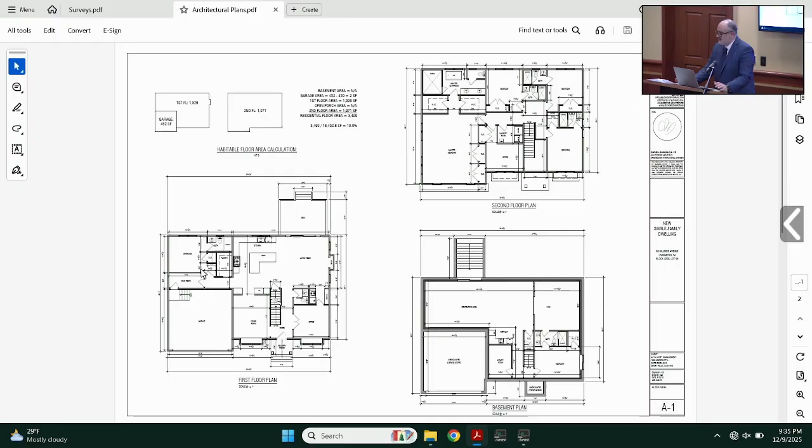So just to be clear, there are two variances requested, the front yard and the rear yard. I'm going back to the site plan because I think it illustrates it. The required front yard setback, as I mentioned, in the R3 zone is 50 feet, and we're proposing 44.6.

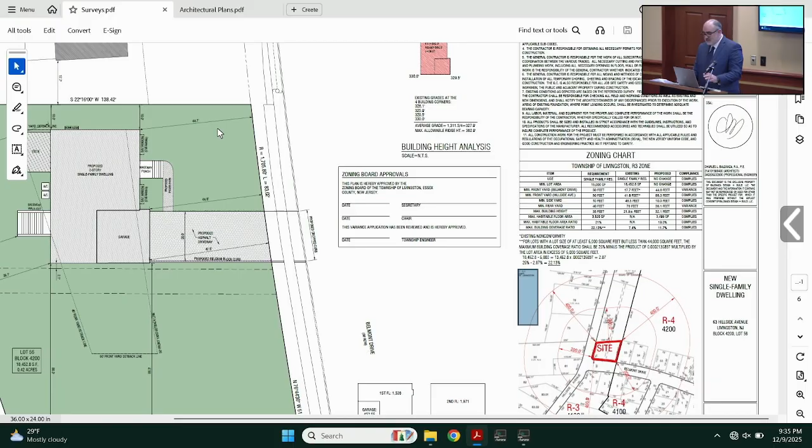For exactly that reason, not to repeat myself, the rear yard is because we don't want to make the front yard more non-conforming. Our front yard at the proposed 44.6 complies with the neighboring properties. The site is suitable for the project.

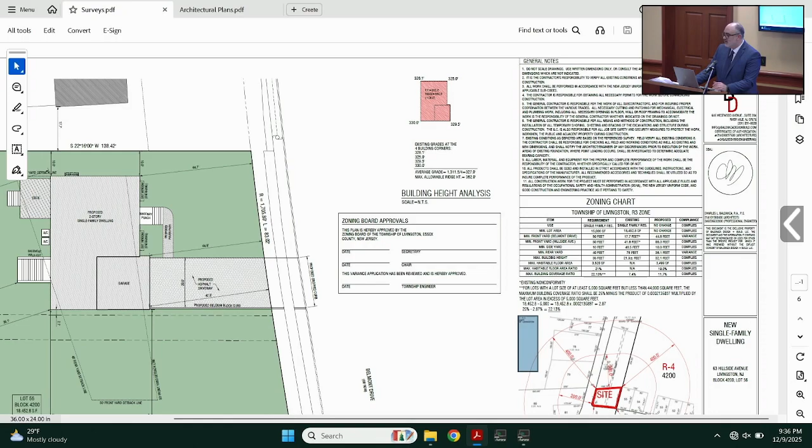Can you point out where the sewer easement is in relationship to the project? It's this dash line here, which continues from Belmont. So you can see it's a dagger right in the middle of the lot, a bullseye, that we had to work around.

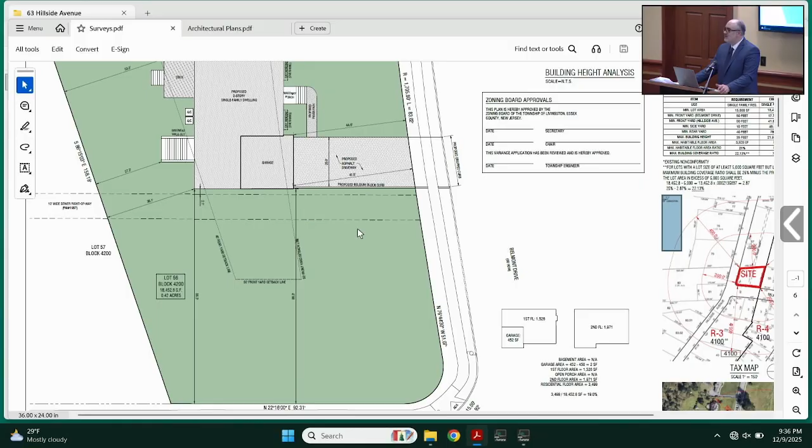I want to talk about, Ms. Bolzano, would you say that because of the sewer easement being straight through the lot, you obviously can't build on the sewer easement? Absolutely. So any applicant would be forced to build either on, because of the orientation, I'll call it the top or the bottom of that lot. Yes, so you're living within the constraints. There's very specific physical constraints to this lot that prevent any applicant from building a home on the lot.

And the top part of the lot gives you more space to build than the bottom half, which kind of narrows down, correct, because of the nature of the line. Would that be fair to say? I would say that's very accurate. So, all things being equal, because of that very unique, weirdly unique set of circumstances where you have this sewer line running through the lot, you have to build the building where it's at. That's really what this is coming down to, right? That is absolutely what it's coming down to.

I wholeheartedly agree. By reason of the exceptional features of this lot, we clearly qualify for our request to the board, which is for a C1 variance due to those constraints of the lot.

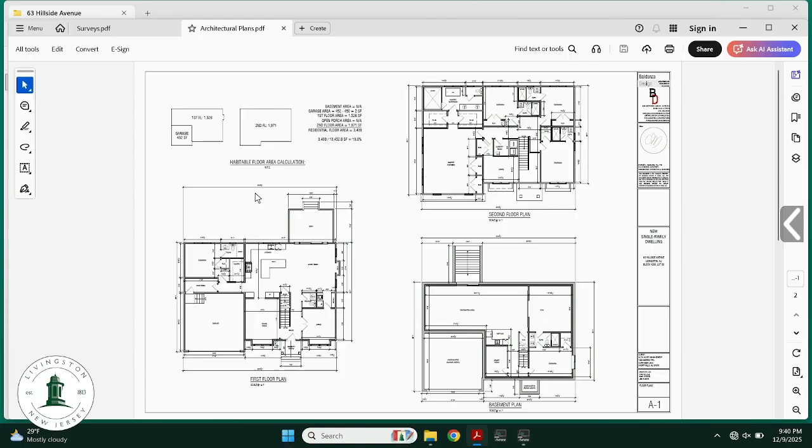I have one quick question, actually two. You have an egress staircase coming out of the basement, I see. That is correct. The basement is not going to be a separate apartment at all, right? No, there is no kitchen in the basement. So you would agree as a condition of approval that it would not be used as separate living space? That is correct. And there's no available height in the attic to have living space either, I believe, right? That is correct, we're going to have a pull-down stair going to the attic.

Does anybody else on the board have any questions for this witness? Does anybody in the public have any questions for this witness? Does anybody in the public want to make any statements?

Back to you, ma'am. I don't have much to add, other than this is a beautiful new home that fits in with the neighborhood, and it clearly satisfies the C1 criteria between the shape of the property, the fact that it's a corner lot, and the sewer easement that just means you build on one side or the other, and they've picked the best side that they could possibly build on. Thank you.

When we get to statements, I had a statement. Okay, does anybody on the board want to make a statement?

I think this will be a big improvement for the neighborhood, so I think you met the standard on C1 and C2. It looks nice to me. So it's sort of a request - it's in my neighborhood, not 200 square feet, but very close to my house, on Hillside. It's more of a request, because I think you met the standard for the variance and I think it would add value to your home. The side facing Hillside, which is sort of a main road, it's a double-line road in town, so a lot of people use this road.

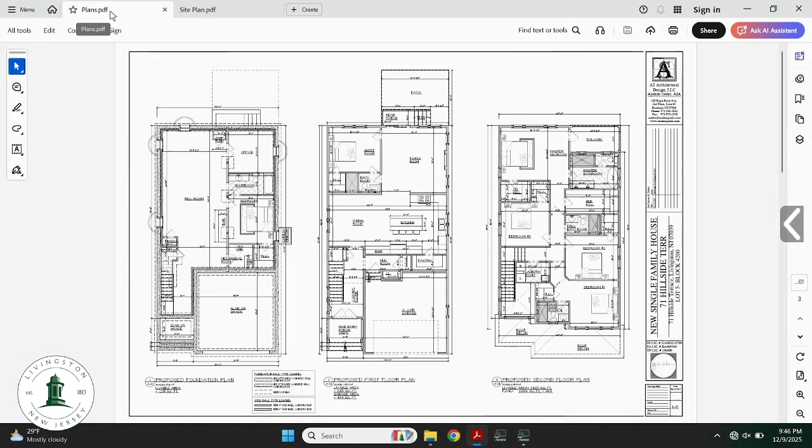Mr. Sedra, why don't you walk us through what we're looking to propose tonight? We are proposing a single-family house located in an R4 zone. If you look at the floor plans, the first floor hosts the living spaces, and we have a 2-car garage facing Hillside Terrace. Also, the first floor has one guest bedroom with its own bathroom and closet. The area of the first floor is 1,215 square feet livable area, and the garage area is 434 square feet.

The second floor consists of 4 bedrooms with bathrooms and closets, and also a laundry room. The area for the second floor is 1,423 square feet, with a total floor area of 2,638 square feet, and the floor area ratio is 36%, with a 6% variance required for the floor area ratio.

The attic is only accessible with pull-down stairs from the second floor. At the rear of the house on the second floor, we have a small balcony, 6'8" by 12 feet.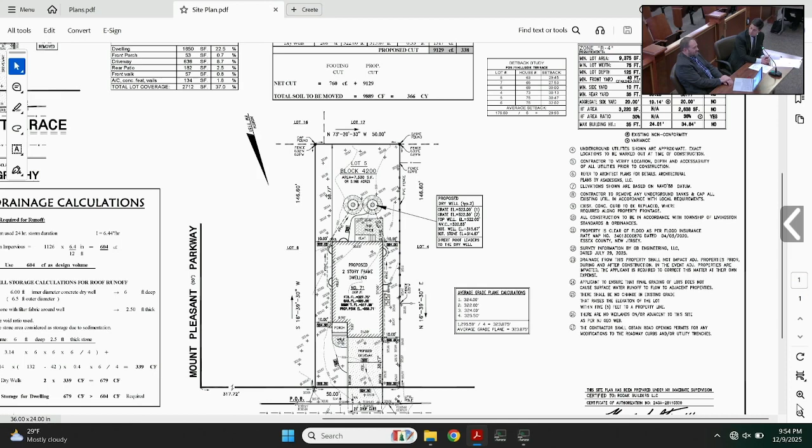There's certainly no substantial impairment to the zone plan or zoning ordinance with the granting of the FAR variance. This is a pretty modest single-family house in a single-family zone. With respect to the front yard setback variance, as you know, it meets the averaging allotment, however the board deems that to be a variance. That variance certainly could be granted under the C2 criteria, advancing purposes of zoning A, G, and I without substantial impairment to the zone plan or zoning ordinance.

So is it your testimony that we have satisfied the requirements for the averaging of the front yard setback? Yes, we have. So for this proposed application, would you say that it is balancing the proposed bulk standards, considering the fact that although we do have a ratio variance, we have eliminated 3 other variances, and taking into consideration the site constraints, the habitable floor area is approximately 583 square feet below what is permitted?

Yes, touching on some of those setbacks that are being improved, an 8.12 feet exists today, whereas 10 feet is proposed, so the applicant's a little bit under 2 feet. That's increasing the side yard setback, also increasing that aggregate side yard setback, which is deficient as well. So certainly with the C variance, which is also termed a benefits versus burdens variance in the planning world, the benefits of this application certainly outweigh any detriment of granting the variance.

Great, I have no further questions for this witness. Does anyone on the board have any questions for this witness?

I'm going to rescind my last comment because I had my packages mixed up, you have so many of them, so that'll be for a different application. The positive comment will have to wait. Yes, yes, I rescind my positive comment.

Does anyone in the public have any questions for this witness? Does anyone in the public want to make any statement regarding this application?

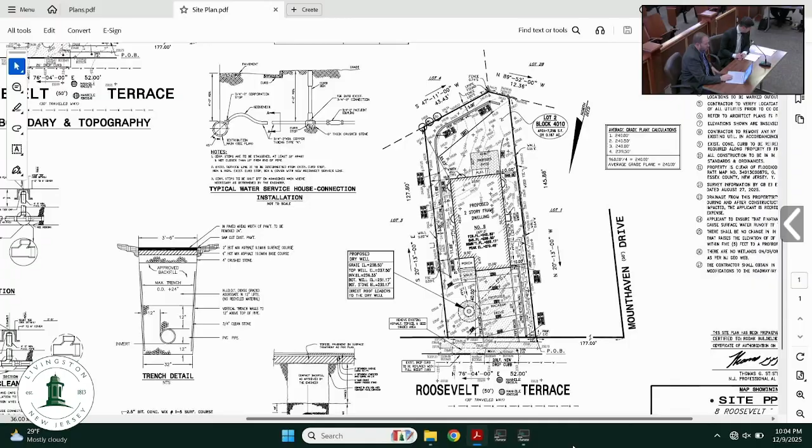Thank you, Chairman. This is an application very similar to the last one, although the benefits by this application are actually a little bit greater. This is for a specific piece of property known as 8 Roosevelt Terrace, Block 4010, Lot 2. The applicant is requesting a habitable floor area ratio variance, whereas 30% is allowed, 36% is proposed, a 6% variance request. This is also an undersized lot by a little bit over 2,000 square feet.

The applicant is increasing the front yard from 34.69 feet to 40 feet, eliminating an existing deficient side yard setback of 4.58 feet, bringing it into conformity with 10 feet, and increasing an aggregate side yard that exists today from 11.29 feet to 21.69 feet, which is in conformance with ordinance standards. Similar to the other application, this zone does allow 3220 habitable floor area square footage. The applicant is 609 square feet less than that requirement, coming in with a dwelling at 2611 square feet.

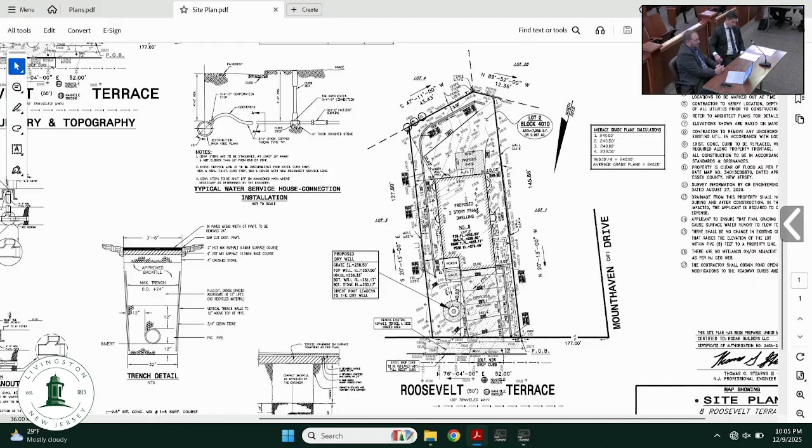So when you look at all these elements combined, the applicant is getting rid of a great amount of existing nonconformities, bringing many elements into conformity. Looking at the requirements for the habitable floor area ratio variance, the applicant certainly can accommodate the use on the site given the variance request, and can also advance the purposes of zoning A, G, and I without substantial impairment to the zone plan or zoning ordinance.

Terrific. I have no further questions for this witness. Does anyone on the board have any questions for this witness? Does anybody in the public have any questions for this witness? Does anyone in the public want to make any statements? Come on up, please.

My name is Alan Barron. Just to give some context on why I'm here tonight, I'm an R4 homeowner. I think Livingston has, like the rest of the country, a severe housing crisis. It's not clear to me how we're actually managing that, so I'm here to learn. I just wanted to give my perspective on this particular variance.

I think given that this lot is undersized, asking for a variance to bring it up to what should be the minimum for an R4 makes complete sense. Giving them a variance so they can build as big as you could build on a 9375 lot makes a lot of sense, and they're building smaller than that. My only comment would be, talking about it complying to a 3220 shouldn't really be the context, because you would need a 10,700 square foot lot to do that, and you're 3,500 square feet short of that.

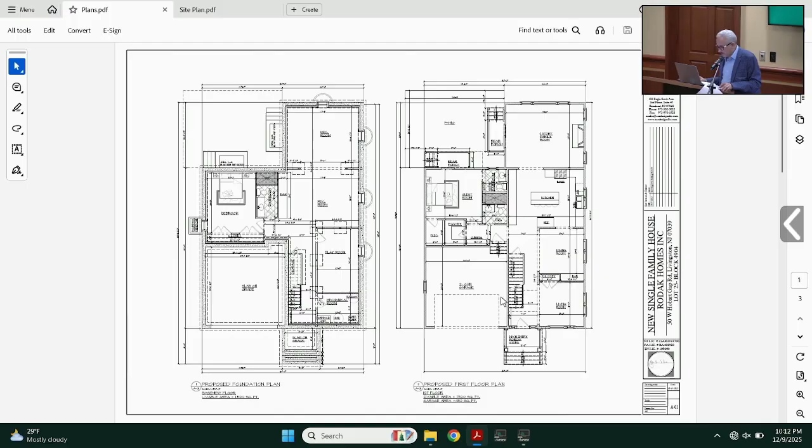Mr. Sedra, were you the architect responsible for the architectural plans before this board tonight? Yes, I am. Why don't you walk us through what we're looking to do? Sure. For this lot, we are proposing a single-family house. In sheet A01 on the right side, you'll see the first floor plan where we see all the living spaces. We also have a one-story family room, kind of separate from the house, at the back.

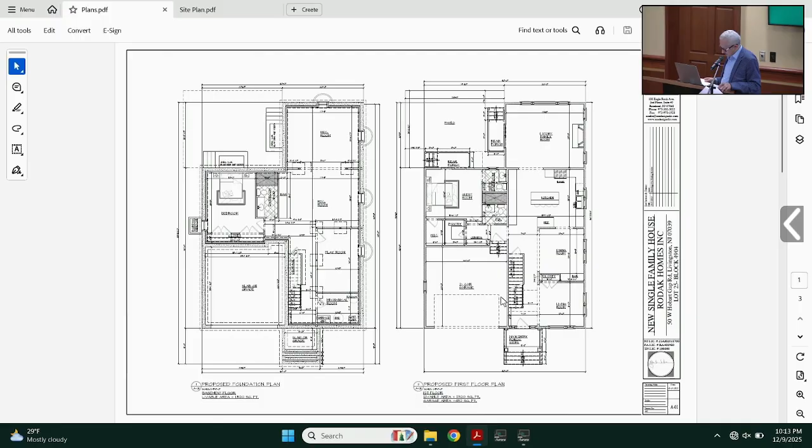We also have a guest room with a sliding door that gets out to the rear patio, and a two-car garage facing West Hobart. The area for the first floor is 1,520 square feet, with a garage area of 432. The left side of the first floor is the basement, where we have open space, a bar area, a bedroom, and a playroom. The bedroom has its own egress window.

The livable area for the second floor is 1,620. The floor area is 3,140 with a floor area ratio of 36%. The design of the exterior is a colonial style home with board and batten at the gable end. We also have James Hardie horizontal siding as the wall facade, and a base of cultured stone.

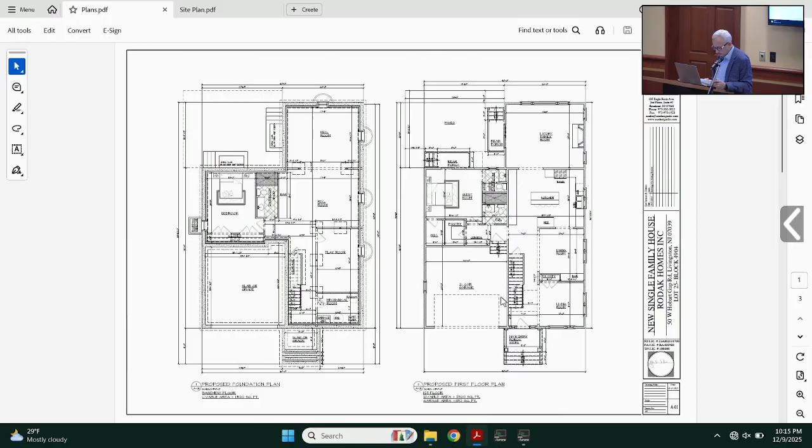Just to confirm, the attic itself is only accessible by pull-down? Correct. Thank you, I have no further questions for this witness.

Does anyone on the board have any questions for this witness? I will make a statement about the roof, though. I really like that 6 on 12. Just to put that on the record on the correct application.

Does anyone in the public have any questions for this witness? Come on up. Do this long enough, I'll learn the right questions to ask. That's okay, it's all good.

Can you tell me what do you have for the lot size? The lot size, I have 8,730. Thank you, appreciate it.

Okay, back to you. I'd like to call my last witness, please. Mr. Nick Graviano. Oh, there you are, Mr. Graviano, do you swear or affirm to tell the truth for the zoning board tonight?

I do. All right, Mr. Graviano has been qualified in the field of planning, and no emails, right, Nick? No. Okay. I don't think anybody at the state's working right now, but.

Thank you. This one is requesting one FAR variance. The applicant is requesting 6%. As the neighbor just indicated, this is an 8,730 square foot lot. The lot's roughly 645 square feet less than what's required by ordinance. The applicant is proposing a dwelling which is below the habitable floor area by roughly 80 square feet.